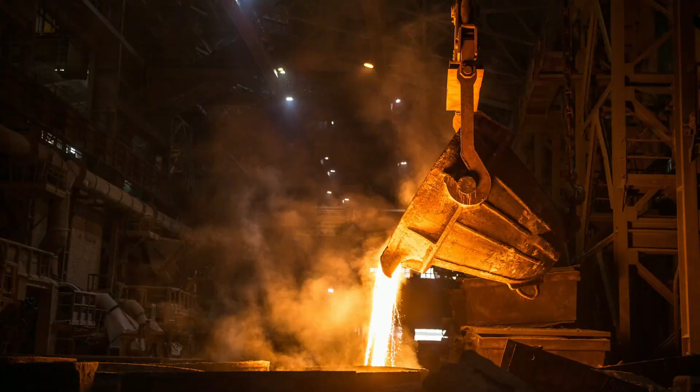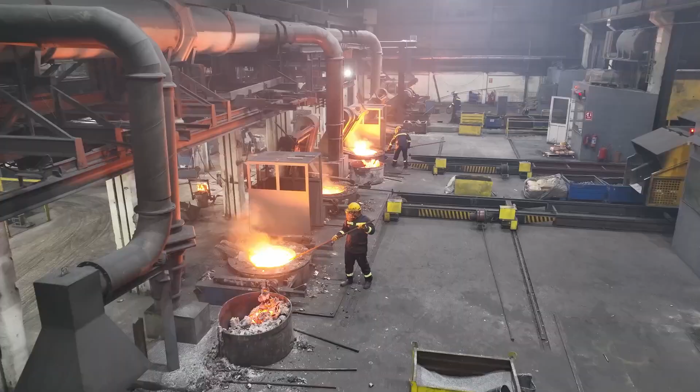The main technological feature of the metal powder industry is the use of various powdered materials as feedstocks: metals and their alloys, metalloids, metal non-metal compounds, and other substances. However, processing, mixing and dispersing thereof encounters high energy and material costs.

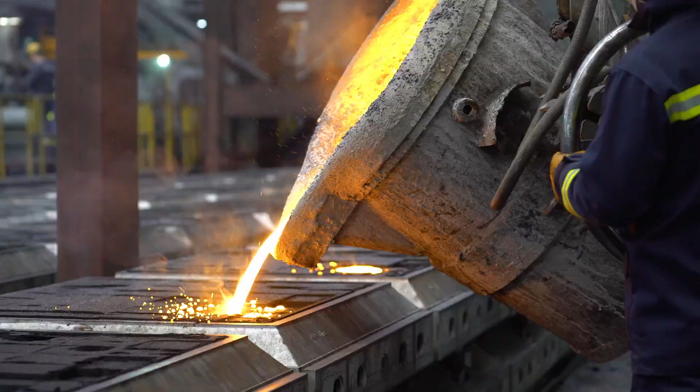The processes typical of the metal powder industry are those related to production of refractory compounds. The excellent properties of such compounds ensure that they are widely used in modern technology as a basis for hard alloys, heat-resistant, electrical, corrosion-resistant, and other materials. In most cases, refractory compounds are produced through reduction of transition metal oxides by means of reducing elements.

The appropriate metalline phases are formed by reactive diffusion. This imposes stringent requirements on preparation of charge material, the constituents of which should be finely dispersed and thoroughly mixed. Various types of pulverizers and mixers used in addressing these tasks do not meet the existing production requirements.

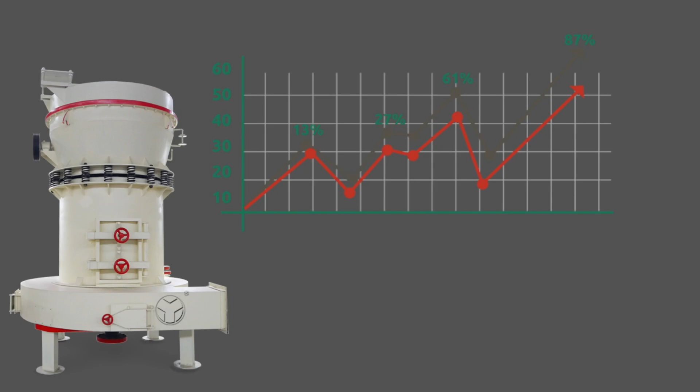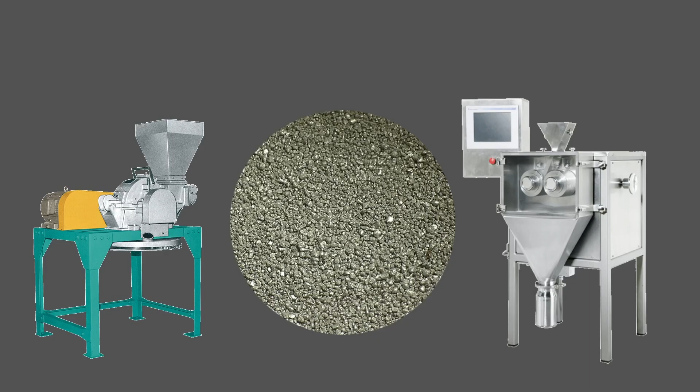Therefore, powders of the required grain size are produced by sieving on vibration screens of various designs. Mixing of charge material constituents is time-consuming, since the properties of finished products largely depend on how uniformly the constituents are distributed. In view of the above, GlobeCore has developed a technology for dispersing and mixing of powdered materials with the use of AVS vortex layer machines.

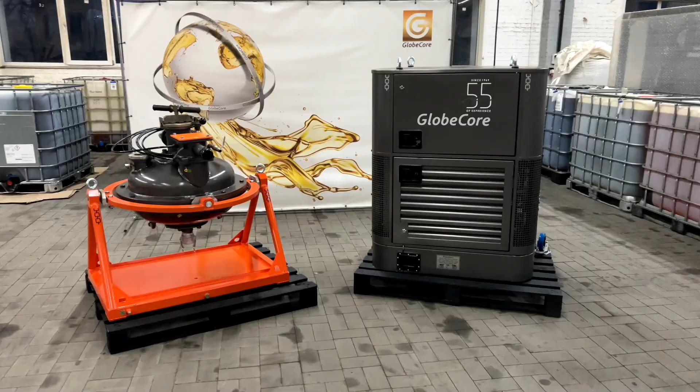A vortex layer machine is a unit consisting of a rotating electromagnetic field inductor, an operating chamber, and ferromagnetic particles placed in this chamber. The rotating electromagnetic field causes the particles to start moving in the operating chamber along complex trajectories, constantly colliding with one another, with the chamber walls, and with particles of the metals processed.

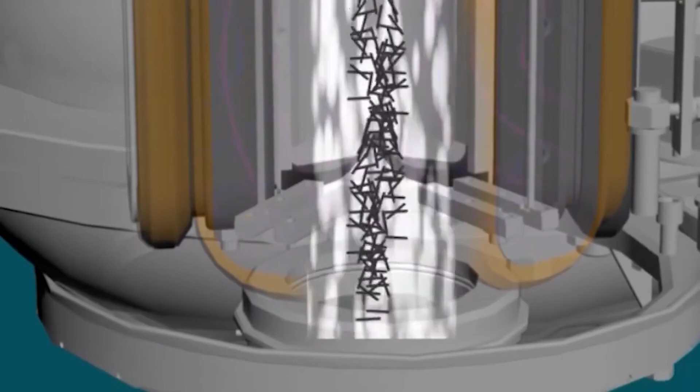Furthermore, there occur a number of factors and processes in the machine's operating chamber that contribute to concurrent fine pulverization, mixing, and intensification. These include a rotating electromagnetic field, intense impacts, high local pressures, ultrasound vibrations, magnetostriction, etc.

In order to process powdered materials in the metal powder industry, GlobeCore recommends using AVSp 100 and AVSp 150 vortex layer machines, which operate in batch mode.

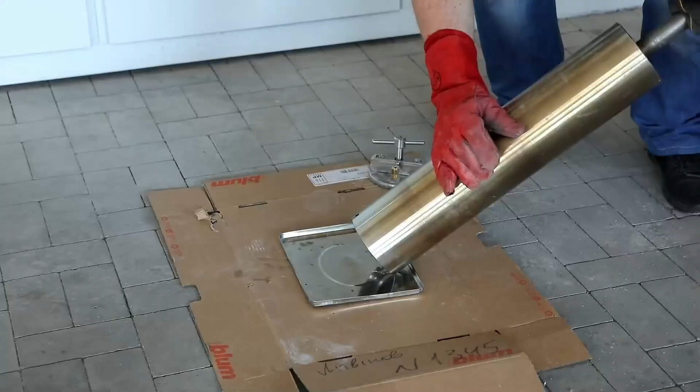In these machines, an additional factor of mixing the constituents is caused by motion of the operating chamber relative to the inductor. As a result of processing that takes just a few minutes, vortex layer machines ensure finer pulverization and better mixing compared to ball, hammer, and centrifugal mills, and can be used to pulverize and mix refractory materials, such as tungsten carbide, zirconium carbide, titanium boride, molybdenum silicide, titanium carbide, molybdenum boride, and others.

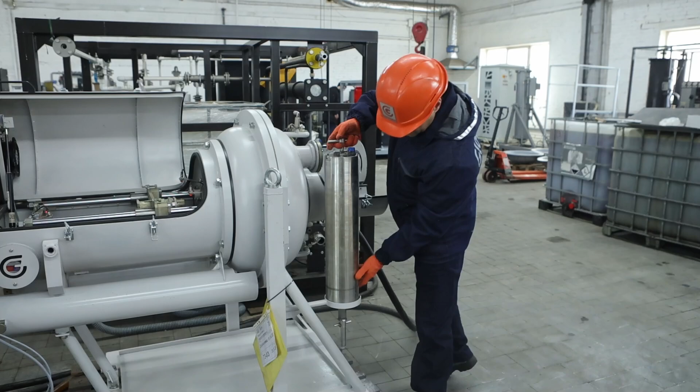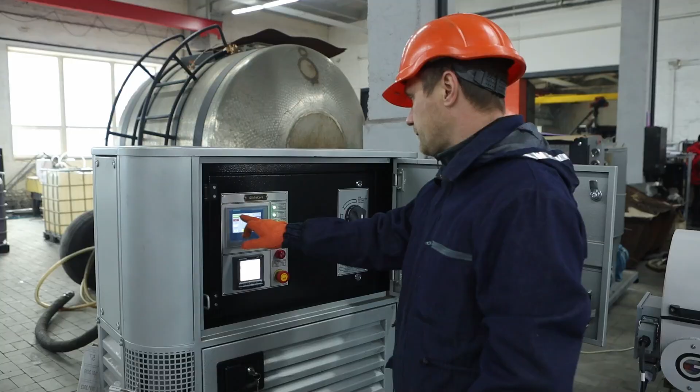Thus, the use of AVS vortex layer machines in the metal powder industry allows intensifying the process flows, as well as improving the production culture by excluding the ball and vibration mills as sources of abnormal noise and dust from process flows. And what other challenges is your metals production facility facing?